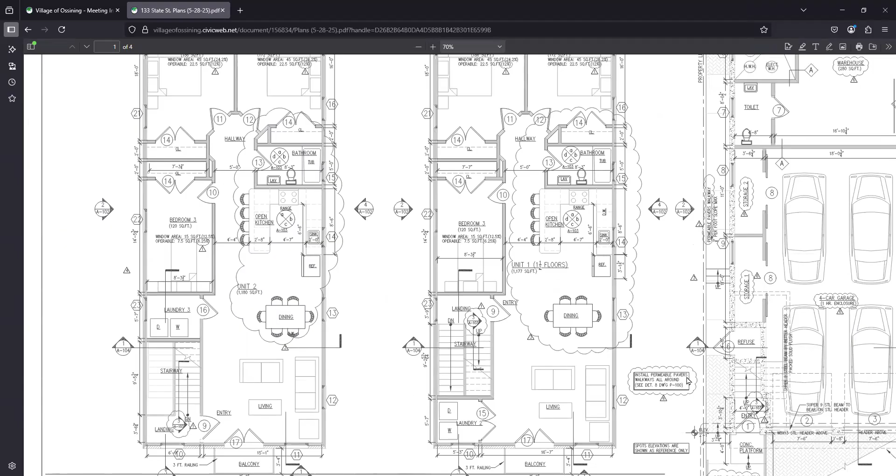On the second and third floor are two units with 3 bedrooms each, an open kitchen and a living room in the front. They're both basically the same layout, with a balcony in each one. Maybe we can move to the elevations.

That's the section, that's a long section, that's basically what it is. We have elevations on this set, there's a couple different sets in there. That's the last page. There's two drawings I know that have... it's probably best to start with that, the rendering. Yeah, that's the rendering, right?

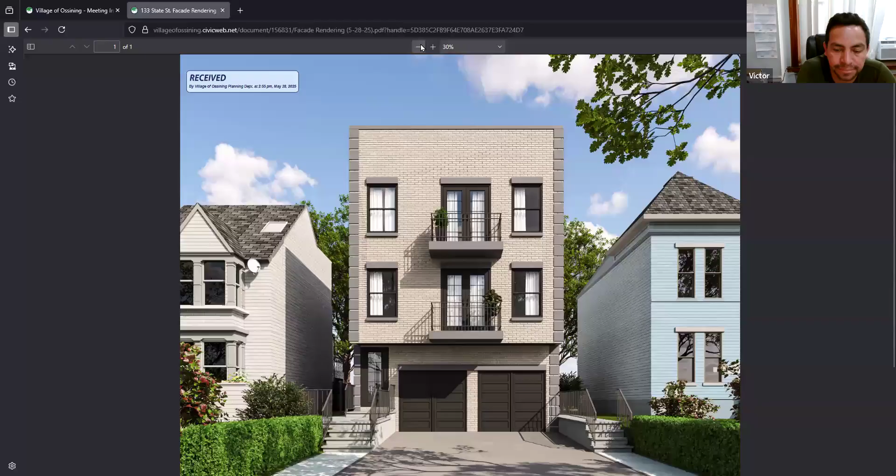Can you kind of go through materially what you're proposing here? Yes, the idea is to have this entry with two garages, two doors. We're doing this dark material for the doors with brick front, with an accent on the corners. And then the front is going to be all pavers.

Only the landings are going to be concrete and stone. All the walkways are going to be pavers. The color of the brick, as you can see, is very light beige. And the siding on the sides, just the front is brick, the rear and the sides are a light beige, tan color.

Okay, we'll pull those drawings up in a second, but let's stick with this drawing here. Can you just describe the material, the brick, the quoining on the sides, on the corners of the building? Is that material stucco? It looks like stucco, but it's actually a brick accent. Yes.

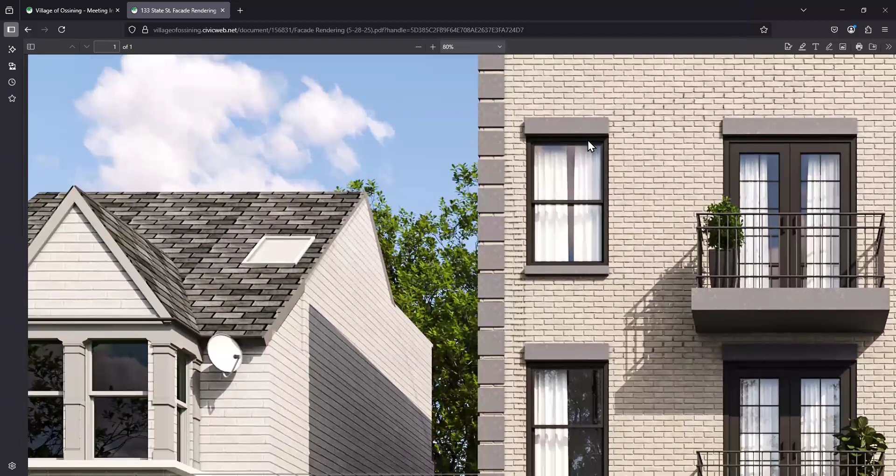Oh, so those are actually... if you zoom in on those, maybe I'm seeing that more here. Yeah, those are, this is probably the rendering effect, but in the drawings it's more clear. They're all brick. Okay, and how about the lintels? The lintels are all brick as well, the same color as the accent on the corners. It should be, they're not expressed like that.

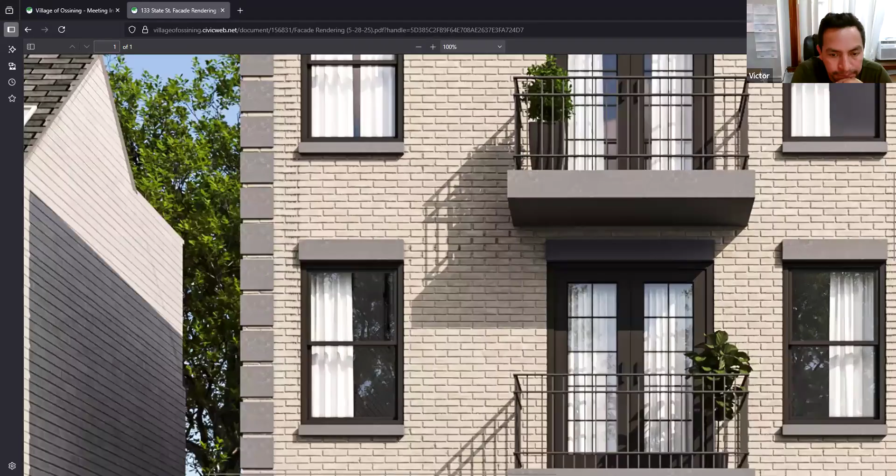And what about the balconies, the fascia around the balcony? They're not concrete, but they're a wood material, hung from the structure, with the railings that are shown up there. What kind of rail, is that a metal railing? It's metal railings, unless the owner wants to change it, because that's what I thought. Yeah, no, the metal is going to be metal. It looks like aluminum or something.

Can you just describe what the material is? Is that rendering accurate in terms of what you're proposing, in terms of the design? Yeah, that render is very much close to what we wanted.

You said the balconies are wood, but is that fascia also wood, or are you proposing something else? It's got to be a cover material. It's going to look very solid on that side. I think we're going to do it so it looks like concrete, but it's going to be done with the EIFS system.

Right, so it's a stucco. Yeah, stucco. And is there no drip edge or anything on the top or from the roof, or will the stucco be straight through the way you're showing it? Well, I think probably he wants to stick with stucco. I think I agree, because it would blend the whole thing.

But on the plans, that would be the owner's decision. That's fine, but keep in mind we're asking these questions because our board is evaluating the facade and the design of the exterior of the building. To the degree there are decisions that need to be made, we need you to make them before we can approve the project.

Okay, so Victor, do you think it's going to be stucco on those things, even in the cap above? Well, I don't... that on top, that's going to be... Excuse me, I don't want to have a design conversation in here. I think one of the things we're doing is starting a conversation and putting some questions out there. To the degree these are not items you guys as a team have decided on yet, I think it's fair for you to come back.

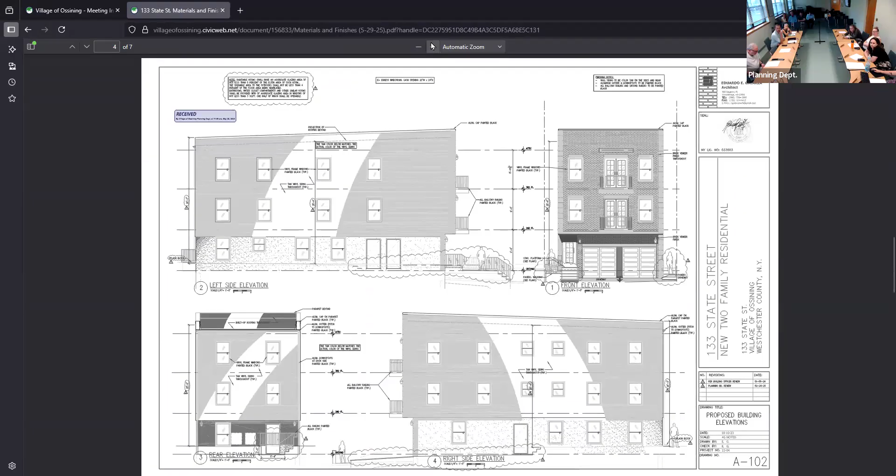Let's look at these secondary facades, because I think you started, Eduardo, talking about the sides. Yeah, as you can see, the sides are plank. So, the sides on the back.

The sides are on the back, just the front is gonna be brick. So is it a Hardie plank linear siding? Is it aluminum or vinyl? As the architect, I decided there's gonna be a Hardie plank, tan color, that's the basic idea. I think it says tan vinyl on the elevation, right? Yes, vinyl siding.

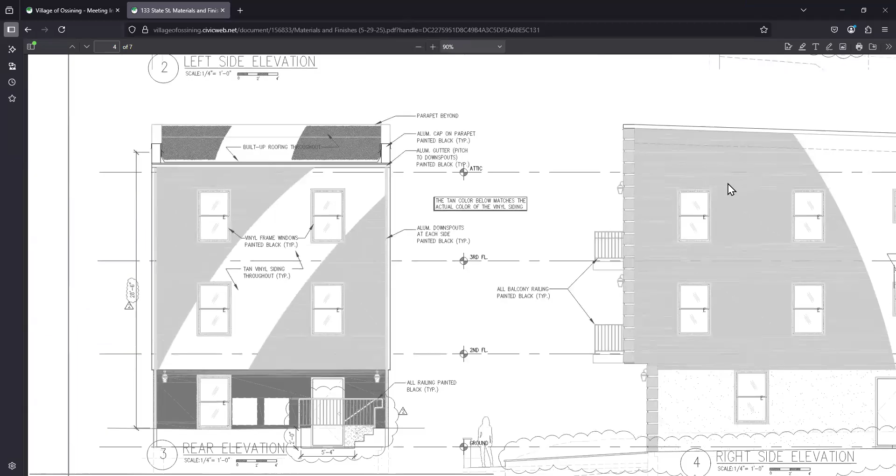One more question - I do want to open this up to the board, but underneath the siding there's a concrete hatch on what I'm assuming is the exposed foundation wall. How is that being rendered? What's that material? That's stucco, right?

I would like to open this up to the board just to start walking through and asking questions here.

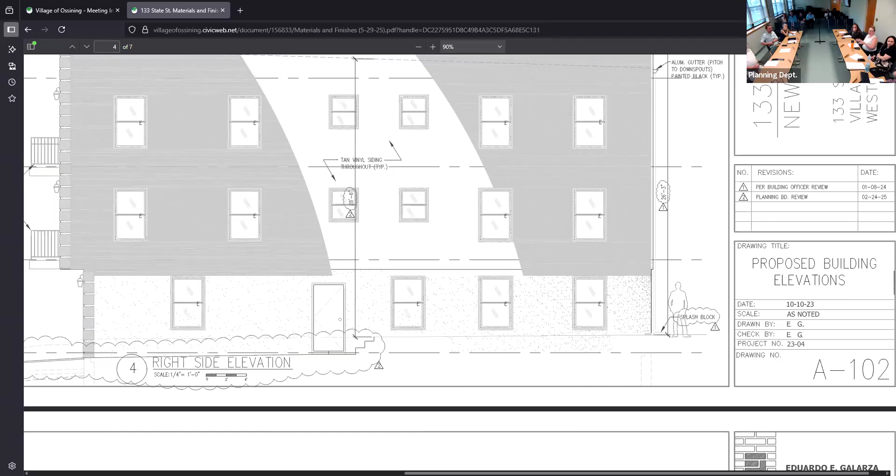I have a question regarding parking - just to confirm, is the intention for the left garage to be for one apartment and the right garage for another? It seems like the cars would block each other when entering. On the ground level with 2 spaces on each side garage, is the intention that 2 spaces to the left would be for one apartment and 2 spaces to the right for the other, so they can coordinate themselves?

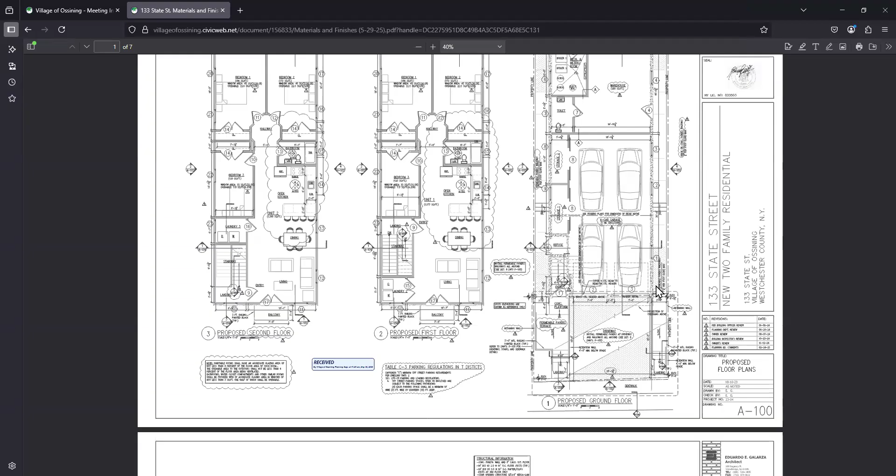There's no entry from the garage, you gotta come out from the driveway. Also for clarity, we are only doing BAR on this one, so there's no site plan review on it. They're fair questions to bring up, but I want to make sure we're staying focused on what we're able to opine on.

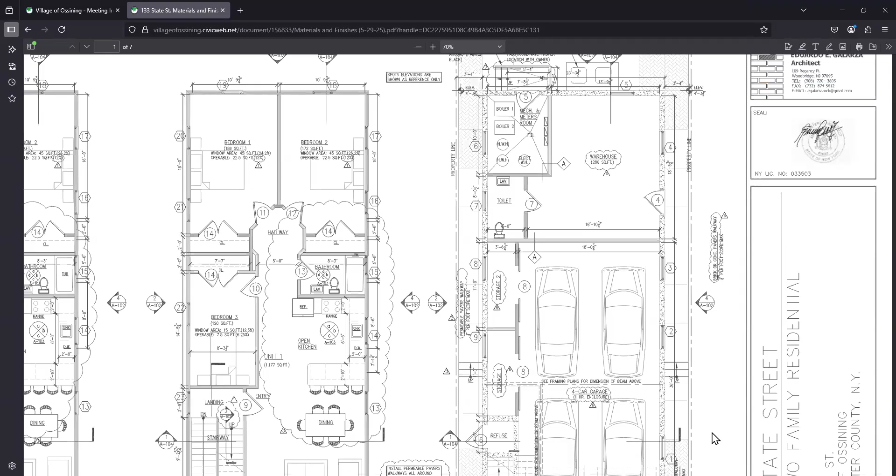I couldn't understand the question. I didn't ask it yet. So I'd like to go back to the rendering and look at the facade.

I have a question about the cornice, it seems a little flat. I don't know what minor architectural detail can be added to make it a bit more interesting, provide a little more depth or context to how the facade reads. The rest of it looks good. It's just that blank space - is there a really high ceiling or an attic up there? No, there's no attic, it's just the pitch of the roof because it's a long building.

Is that a parapet? In the section, you're showing a parapet facing the street, right? Yeah, there's some parapet, about a foot of parapet around it.

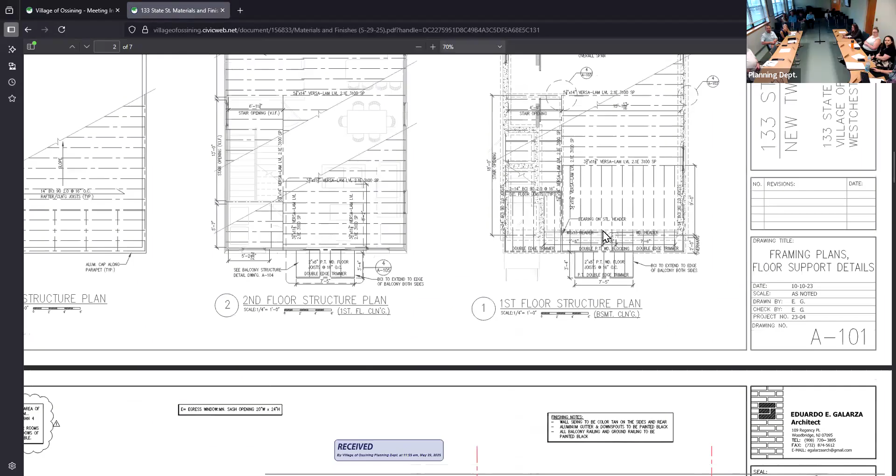And it's a flat roof, I'm assuming? Yeah, it's the back - can we show the section? That would be helpful. You can see it there, I guess - that was the first rendering, the color rendering, as was asked.

It's not showing on this one, but you can see there's a little bit of a pitch on the roof. There's side parapets as well, correct? You have parapets on the side walls and on the front wall, and then there's a gutter on the back, is that correct?

Did you ask me a question again? Yeah - you have parapet on the front, and it looks like two sidewall parapets that are a little bit lower, then a gutter on the back side. So the entire roof drains to a gutter on the rear? The parapet is on three sides - front and sides - and the back has no parapet because the water runs straight to the gutter. Correct, but there are sidewall parapets with leaders on each side.

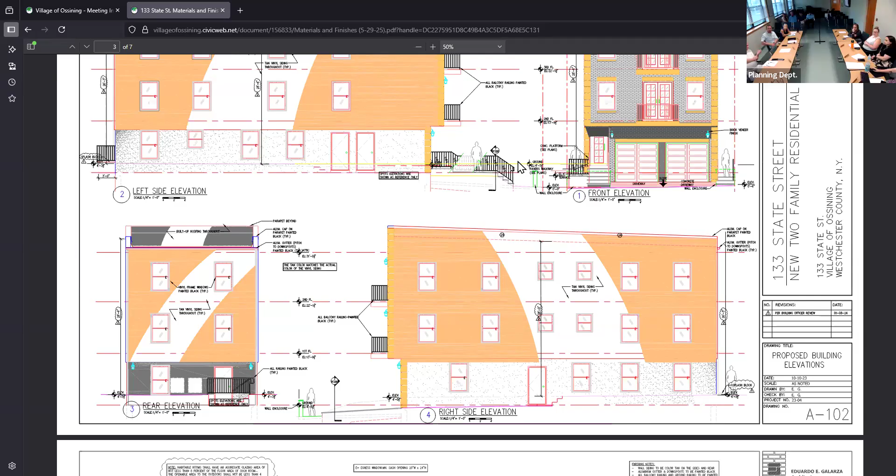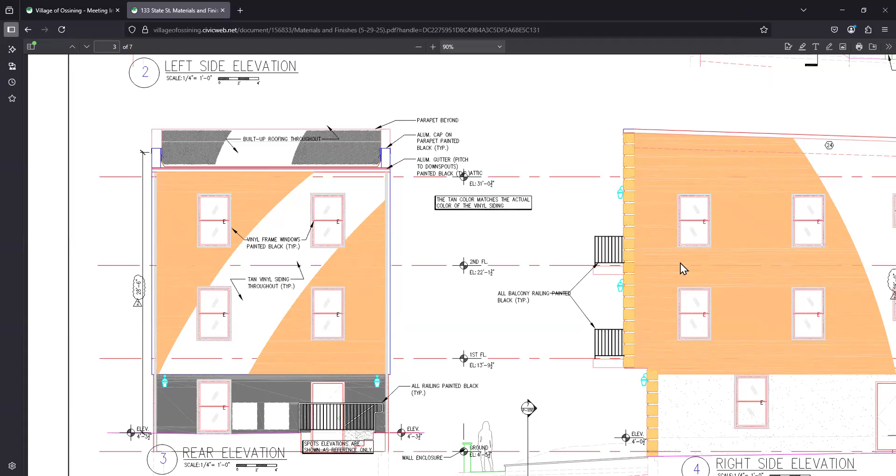Let's zoom in on that rear elevation to see those leaders - are they shown? Yeah, you can see the rear elevation, it's just the roof there, a pitch roof. Are those tied into the storm drain? The leaders tie into a storm drain in the back, yes, all the way down to the ground - a splash pad. So it's not doing what you said.

Your question, I think, was relevant. If we can go back to this, to the street facade, now that you have a better lay of the land, now that you've seen that parapet. Just that, how it's not, right?

Is that an aluminum coping that you're showing on the top of the parapet wall? I think that's what Michael's question was referring to, the cornice or lack of, how the building ends up at the top. Aluminum cornice, aluminum coping cap, is that what you're showing at the top? It's supposed to be aluminum at the top. Yes, aluminum cap.

I don't know if there's a way to, I mean, you've got this contrasting brick color, which you're using in the quoins and apparently on the lintels and sills, which I still have questions about. It should be very much, you know, matching the whole thing, as you can see on the rendering. Even in my own render, this was an artist rendering, but my rendering also shows that the accents are of the same color.

I think that's not the question. I think the question is just that this is very thin, very developed, and nice, but very thin. You may be right. I think it would be nice if you had probably a double line, so you might get an accent to the corner, to the top. Maybe that's what you wanted. Yeah, I agree that it looks a little thin there. Something there to give it a little bit more heft, a little wider. Yeah, we can say, but I agree, they should be a little wider.

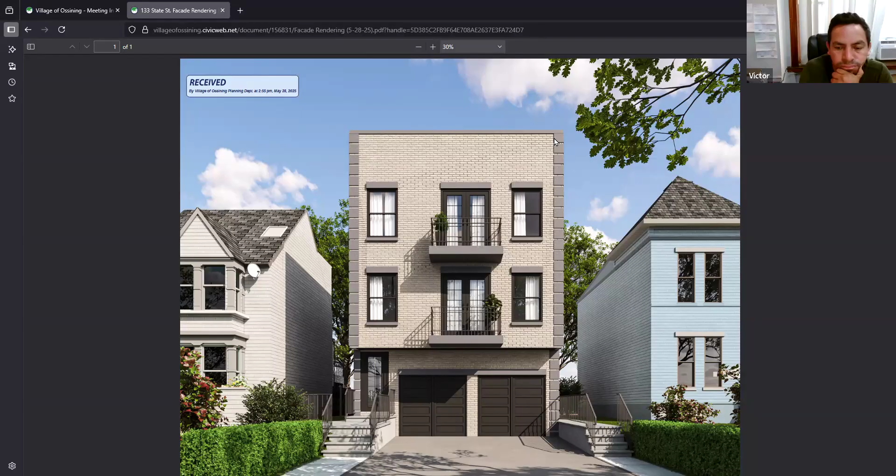Probably the same color as the lintels on the windows, probably. It should match, at least that. Yeah, I mean, probably like 8 inches, right? At least, that's about 8 inches, yes.

I mean, right now it looks like you're cutting one of those corners, like you've got these points, very hefty, and then on top, one of them is something slimmer, so that might be also just a portion that you can borrow from, but I'll let you figure that out, whatever you think makes sense.

I also would like to understand a little bit better the materiality of those lintels, because I think it looked nice. I thought it was like a cast stone or something, and it's also with the windowsills. If you guys want, and it's something you guys will vote for, I can put a stone on the corners and also on the top of the windows if that's needed. We want to start with this project and we don't want to keep delaying, so if that's what you need, I can do that. It looks like a stone on the corners and also a stone on top of the windows, so if that's the case and that's how you guys want it, I don't mind, I can do that.

I don't know that we're telling you what material we want you to use. We're just trying to understand what it is that you're proposing, what that would look like. I think the design may be totally appropriate in that regard, I just don't see that represented in what you've given us.

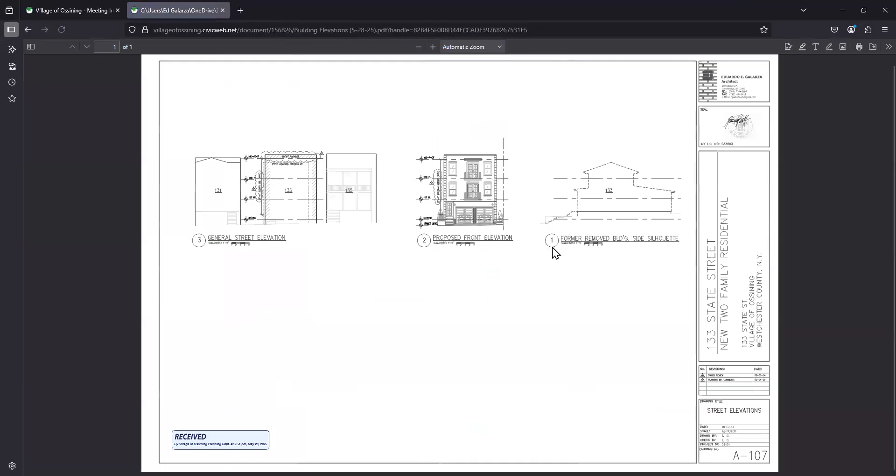Yeah, the rendering is a little bit difficult because that's a renderer's version. We go back to the building elevations. I understand, but the purpose of this is different. I think the other sheet, the one that says materials and finishes, that was in the more developed drawing. So the front, the way up, yeah, it's right there, right. That's right.

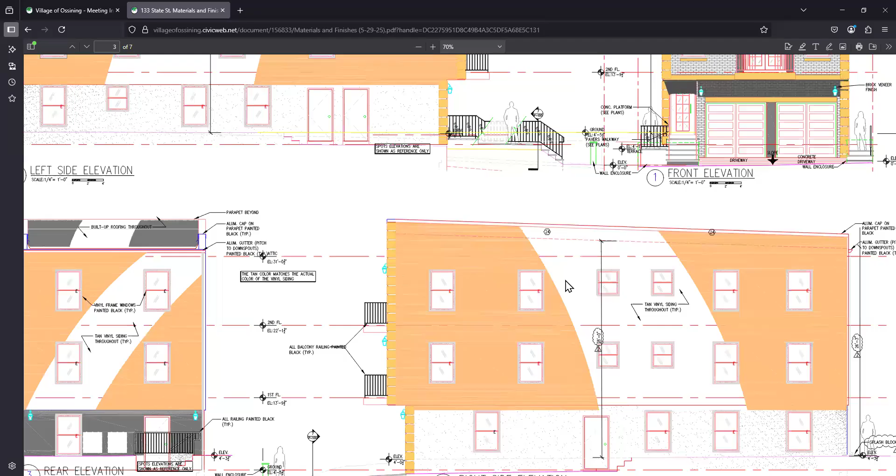They said that's going to be painted black, that cap. Right, yeah.

What is that above the second floor balcony? There was an additional cover, that was supposed to be like a canopy, but we took it out. It's not actually in the rendering, right?

So I think the renderings and the plan should match. Agreed. And I'm not suggesting, I know the comment, Victor, regarding, we'll just do whatever material you see here. I think you have some degree of material on this drawing, and if you're showing soldier course brick above the windows and kind of like a row lock sill, I think that may be appropriate.

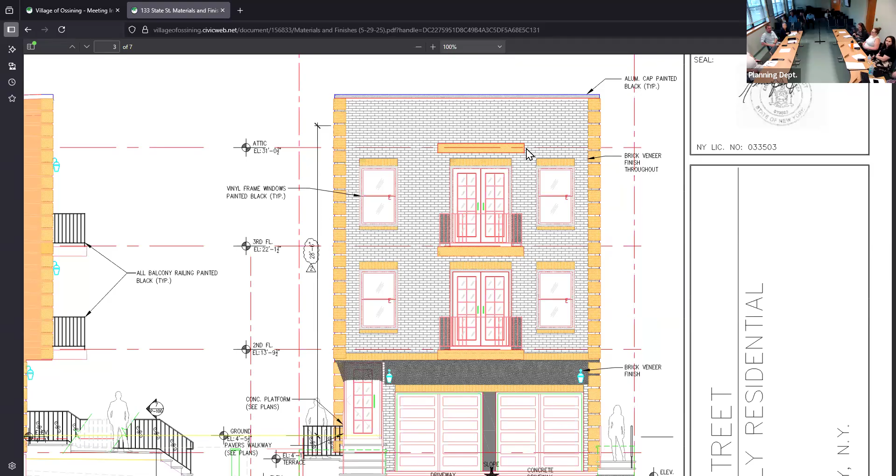I think that the question that Michael had regarding the top of the building is just as evident on this drawing as it was in the rendering. The ring, right? I think that you need to have some resolution to that.

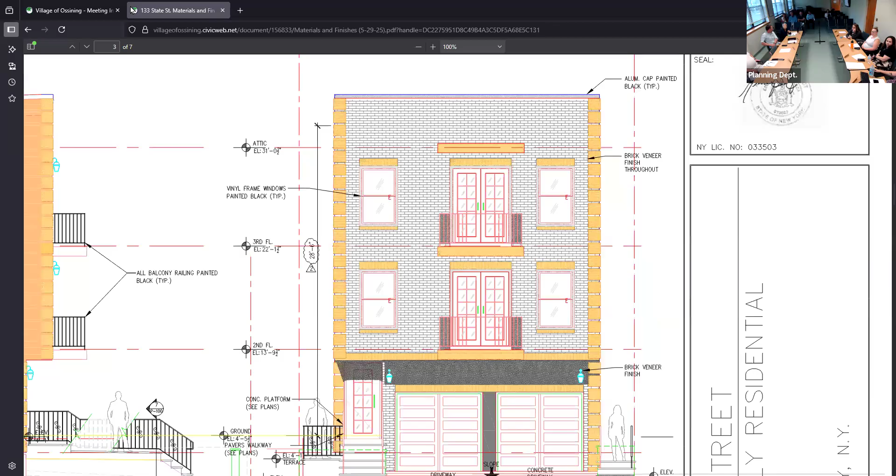I don't know if I have any real comments on the sides or the back. Visibility, who can see the sides, the back, we kind of get a sense just context wise, maybe Google Earth. Well, there's a site photo that shows the adjacent properties. Color photos of site right there. So it's pretty locked in with those three properties.

And I think it would be good to clarify whether it's HardiePlank or vinyl that is going to go on the sides of the property. There seem to be some.

Once this building, like this photo is probably a good one, if you're walking down the sidewalk, how far away are you from the sides of the other two houses? And the reason I'm asking the question is to get a sense of how much of that you'll see and how much of that siding you'll read as you're walking down the street.

Basically, I think the minimum distance between buildings is about 6 feet on the side. But we have 3 feet off from each side on our building. 3 feet on your side and then 3 feet on the other side of the lot line. Yes, that's correct. All right, that's what I assume, yes.

Other board questions on this?

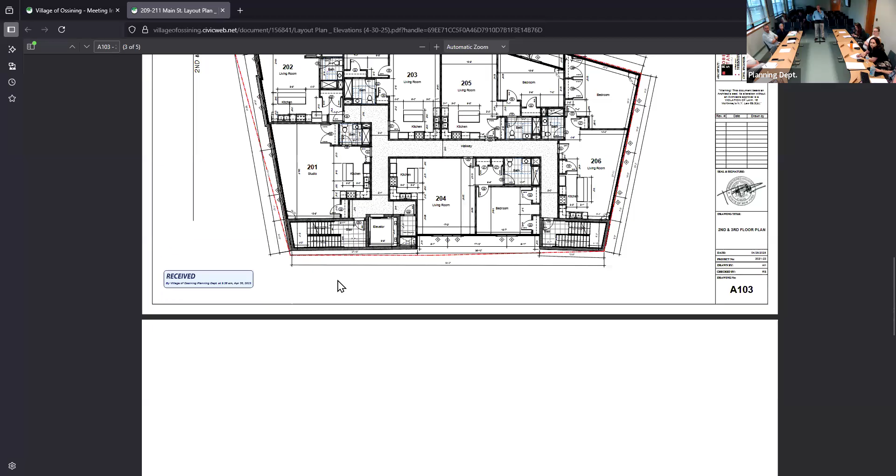The building on the ground floor will be commercial. There'll be 4 apartments behind that, and on the upper levels there'll be an additional mix of studio, 1-bedroom, and 2-bedroom apartments, for a total of 16 apartments in the building.

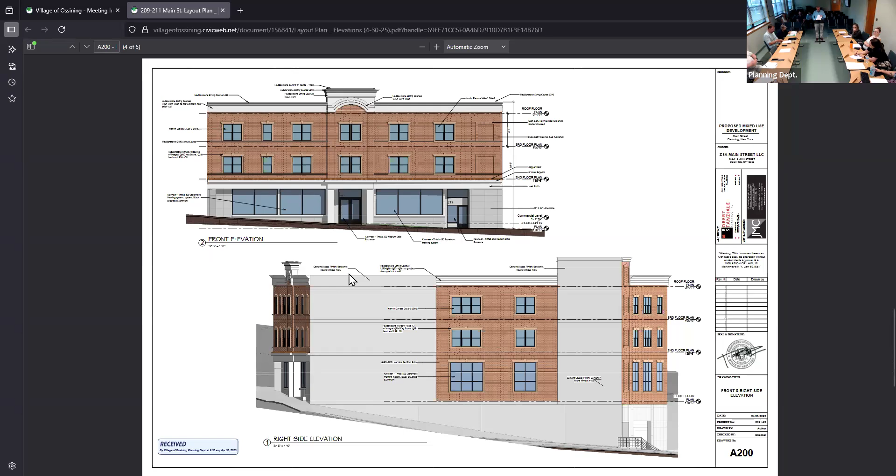The parking areas I mentioned will be in the lower level, accessible from the municipal lot in the rear. We are shy 1 parking space, but we also propose to utilize stacking units to achieve 28 spaces. We need to have 29 spaces.

That's not an ideal situation. Originally, we had this building designed with 2-bedroom units, but when the zoning regulation changed and increased the amount of habitable space required for apartments, we redesigned and lost a bunch of 2-bedroom apartments, so it didn't quite work out as nicely as it did before.

So we're here, as I mentioned, to continue the conversation as well. If we need to purchase more spaces from the village, staff spaces to use, if that makes the situation better, that's a discussion for sometime in the future.

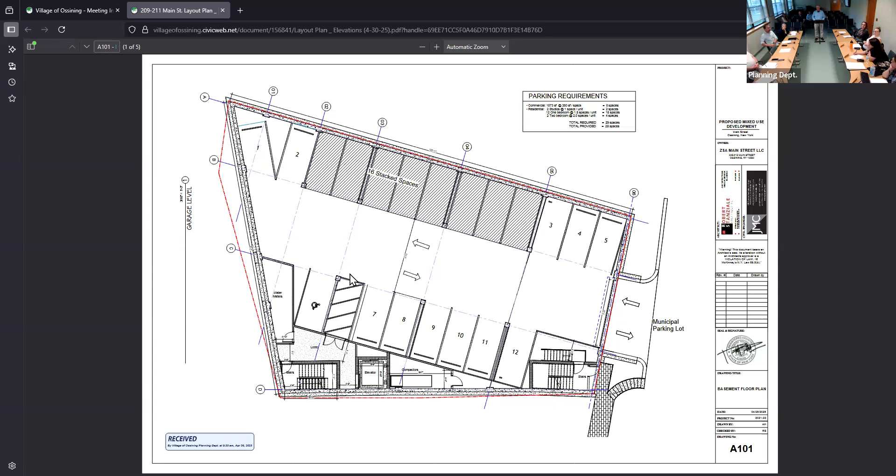The building's lower level will also be a sanitation area. There'll be refuse chutes in the building going to a compactor in the basement, so there'll be private carting that'll pick up the compacted refuse out of the rear of the building, coming from the municipal lot as well.

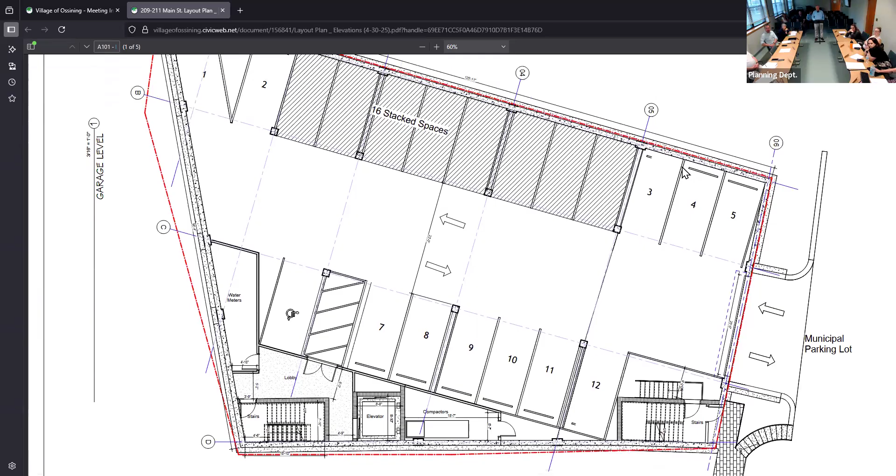Floor plans, as I mentioned, Maddie can show those. You can see here at Main Street the commercial space runs covering almost the entire side. It's a little over 1,500 square feet.

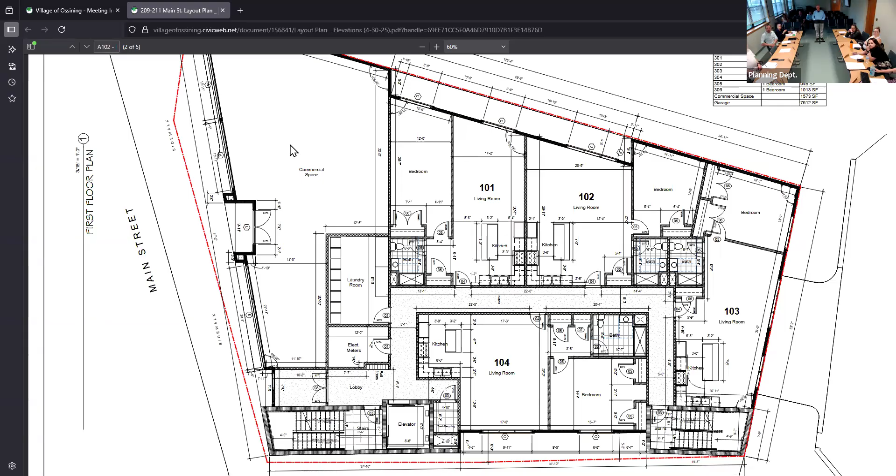On the right-hand side of the building, in the lower left of the screen, would be the entrance to the residential apartments, with apartments behind as mentioned. The entrance is from Main Street, yes, correct, that gives access.

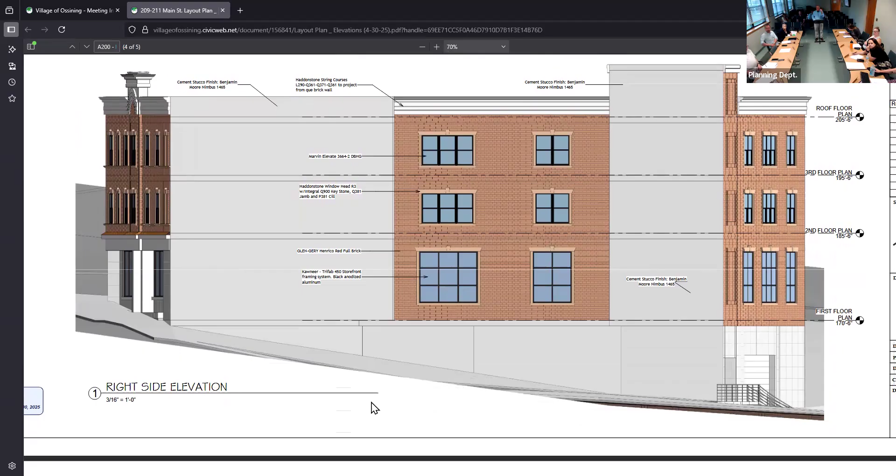As you can see if you scroll down a bit on the map, on the side of the building and in the rear also, since we have a 15-foot first floor to second floor ceiling height, floor to floor difference, we're hoping to incorporate some large, very tall windows so the apartment feels loft-like to make it more attractive, since a couple are undersized and have a great view between some of the windows.

Is that a light well next to the sill? It's another building next to it.

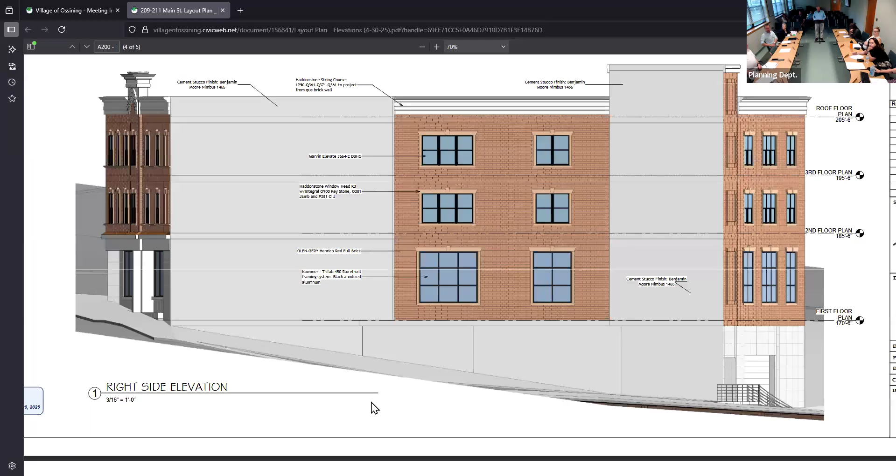We started, just briefly, that's our building. John Meyer Consulting, Rich Gordon will speak a little bit to that, but we've started working on some of the engineering with the village engineer. We're looking to utilize and take some of the utilities for the building from Main Street, and do our sanitary sewer to go out towards the back of the building, to the parking lot where there's a connection back there.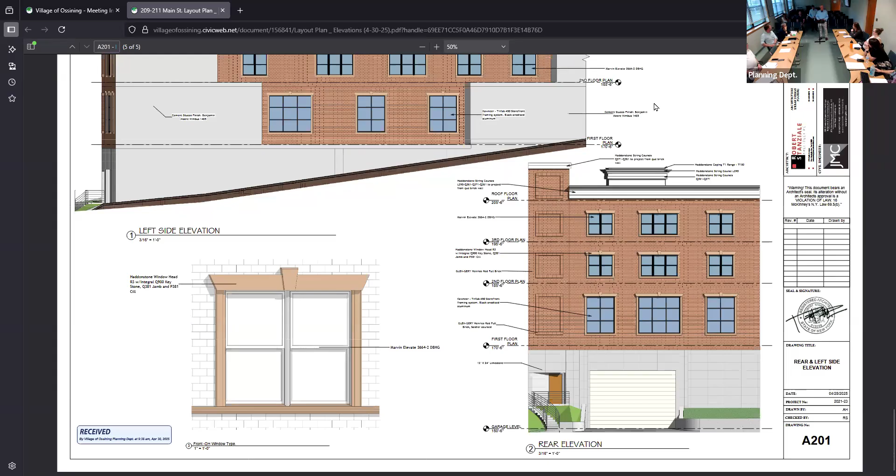You want Rich to speak about that, this would be just... Yeah, I mean, I guess you have someone here, it'd be helpful just to get a lay of what you're planning right now. Yes, right. Rich, yeah, they have that plan. Which one am I looking for? James has the plans.

So, I guess the best drawing to speak to. I'm so sorry, would you mind if you repeat?

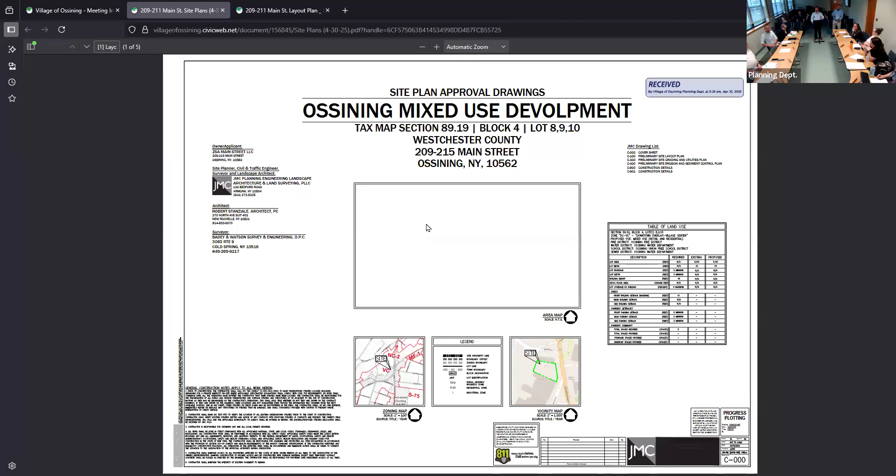Village of Ossining. So right now, this is our site layout plan. As you can see, it's basically a property line to property line development. We are proposing to redo the sidewalks in the existing right of way. The New York State right of way could use some attention. We're spending all this time making this next to the building, so we're going to relay the existing pavers and clean everything up there.

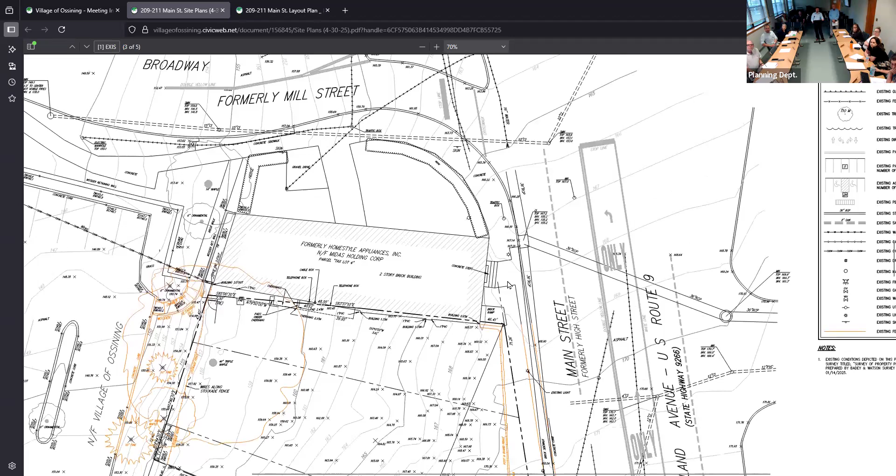We're proposing to, if you want to go to the next sheet, shows our utility connections. Okay, so we are proposing to go across Main Street, which is a State DOT US Route 9. We are proposing a water service connection there as well as a gas service connection. This does require a New York State DOT permit, which is something to process.

As you can see, we have our sanitary sewer connection as well as our storm connection at the back of the building, going through the municipal lot. We are proposing a green roof on the roof of the building, which will help us handle some of our stormwater mitigation there, and get us some attention and project value.

So then what we'll do is drop it down into the ground floor here and run everything out. As I said, this is pretty much a property line to property line development, so we have a limited toolbox that we can pick from to take some measures. That was the easement that you saw on the prior drawings.

The utilities there, this parking lot? Yeah, this is a proposed easement that we're looking at with the town.

Storm and sewer work best under gravity. It's going to be very, very difficult for us to tie this out to the streets. That's one of the biggest things that we are going to do with the town, make sure that... acceptance, right?

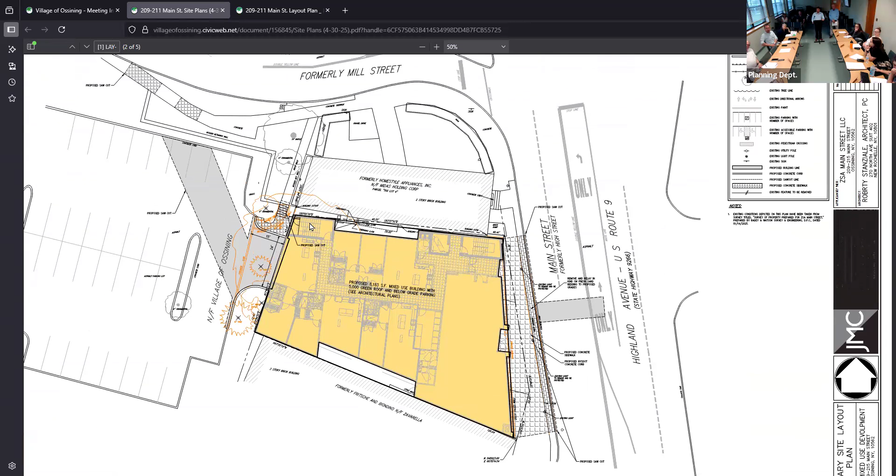So we will be preparing the stormwater management plan in accordance with the 2024 New York State stormwater design management guidelines. So we do have a roadmap ahead of us that we will pursue to satisfy the conditions.

Yeah, no, I think this is super helpful. It's a super challenging site, right? It is challenging, like I said, property line to property line. It looks like, oh great, you threw this box under, now you just draw the lines, but there's a lot of pieces that go into that we have to shake out. Sure, the architects do that, us engineers just take it.

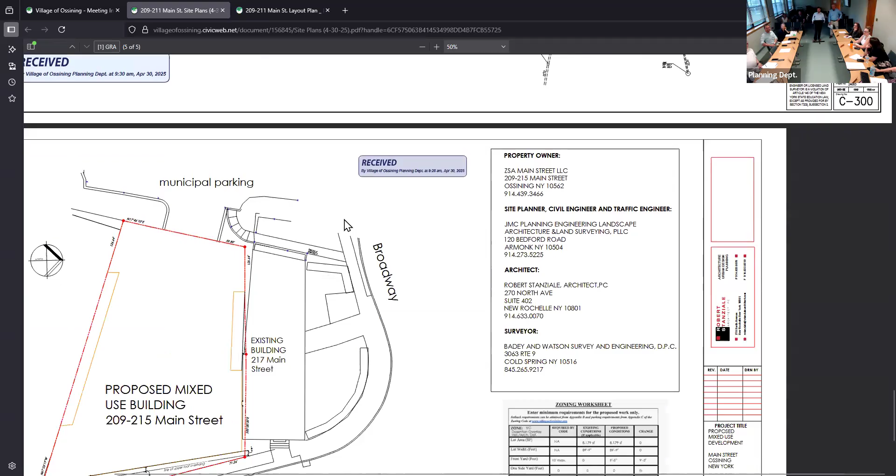I just want to mention something—when you look at those utilities in the back, and I know you're eventually going to have to set some easements and stuff, just be aware of that wall that's there too. Yeah, there is an existing wood retaining wall that we did note there. We anticipated having to redo that, but if you look at where it crosses that wall, it's only about 1.5 feet high.

Okay, yeah, I was trying to line it up when I was looking at the street view, I couldn't really tell where you were at. I was trying to get it, counting down the 4 parking spaces, so it's only about 1.5, 2 feet high. So to be honest with you, we may be able to just tunnel under it, but we'll take a look at it. If it has to be reconstructed, it's something that we're planning for.

Where is that retaining wall? It's running left to right, north. You'll see there's that dog leg up there, right. Let's go up a little bit. Yeah, there's the wall right up over there. It's like a railroad style wall that steps down as the street comes down.

That's actually connecting to the utilities on Broadway there, like across from the rec center. Yes, that's correct. There's an existing drain inlet there, and then there's an existing sanitary sewer there. So we will be connecting to both of those, and that whole area would be...

You would have to do some excavation. Fortunately, the excavation's not very deep right there. I'm running my pipes at about 4 feet deep, which is kind of minimum, so they'll be able to plate at the end of the day and work just like any contractor would be working in the street, make it safe for the public and everything else.

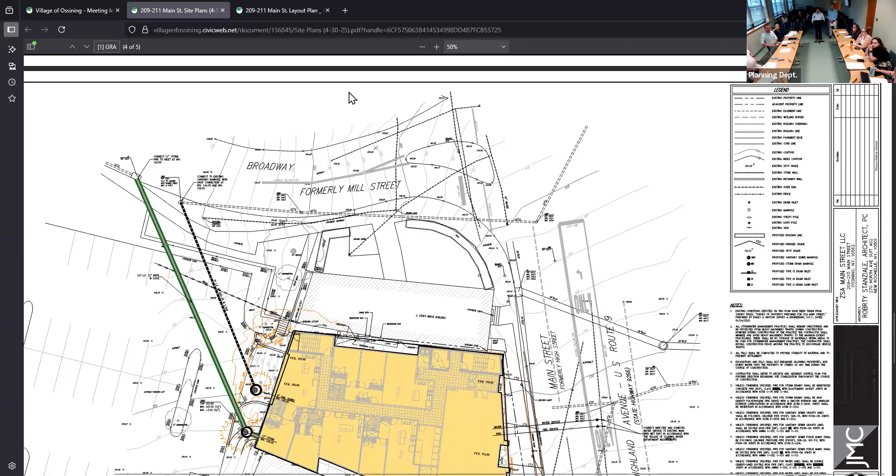Have you guys, this is maybe more of an architectural question, looked at the buildings that used to be there and some of the historic photos of how the site was occupied? I saw one photograph, I hadn't seen much more than that, Mr. Chairman.

I think the Ossining Historical Society has more. Yes, correct. The building inspector showed me a photograph. So I can take it. Yeah, that's just the side.

Yeah, we have plenty of challenges on this site. We're concerned about the buildings and the chases and things like that. So, yeah.

How much site work has been done in terms of site investigation, any soil samples, or any preliminary engineering work? Yeah, we're about to engage in some test work now.

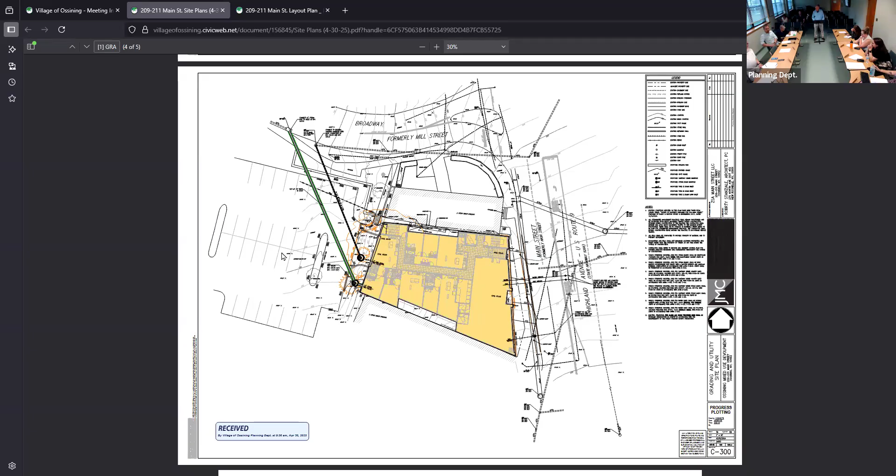I guess, Tony, you started some of your comments, are there any other major concerns the applicant is going to have to focus on that we should be looking at as we start this? They mentioned a lot of it — the DOT, they're going to have to go through that. We have to go to the health department given the flows, which are gonna be close to that 2,500 gallons. Working with the fire department too, since it's a building that's only got two sides, as we mentioned.

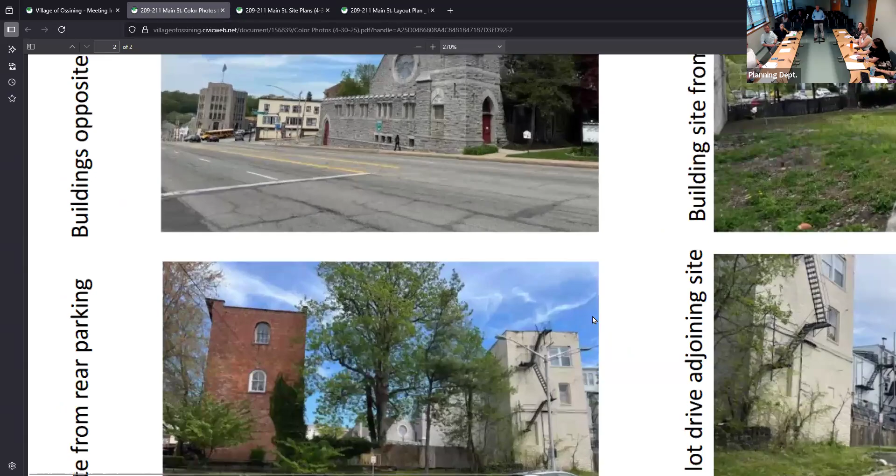Okay, yeah, I didn't know. I was thinking about how the parking lot works, like the ground level residential that's behind this, over the parking lot. Yeah, that's probably the second floor, I think. Yeah, okay, that's just something I had a question on.

But all the engineering stuff, like you said, I understand it's the variance and you haven't gotten into that yet, so a lot of the comments are on stormwater, and that design will progress as that stuff goes to the city. I would start with the health department. Yeah, as quick as you can.

There was some other zoning issues, a concern that came up in the memo about backup space. You can show us on the height of the building. I've done an analysis, we're okay.

I submitted it to the building department previously because it was asked first — we're okay, we're actually at 45 feet as our average height. In that analysis we're having to do some... yeah, looking at the guidance, I didn't see that somewhere.

Right, I think it'll be good, I can provide some. Right, so while the building department probably did look at it, we need it as part of the document.

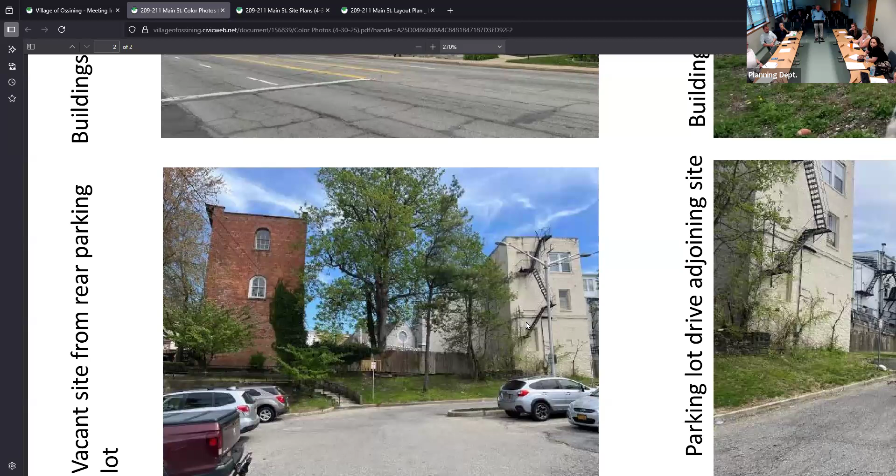Absolutely. I think a couple other things with the zoning — let me just talk about what you're gonna need approvals for, because you're gonna have to coordinate a lot of this. Right, so we are gonna need the board to do SEQR review, and this is an unlisted action.

I would recommend considering doing a coordinated review. Since Westchester County has a number of permits, it might be easier to do a coordinated review with them — they prefer that if possible.

And then also in terms of finalizing your zoning, we still have to figure out if you need any zoning variances. If that is the case, it would be easier to do a coordinated review.

You also need historic preservation approval — so again, another reason. And then village board approval will need to be granted for both the easement as well as the access for the parking lot. And then you also need a referral from the EAC for the local waterfront revitalization consistency.

So we can coordinate when the best time to go to these different boards is, but at this point I think we need another round of submissions in a little more detail before you're ready to start with that.

The other thing too is on your plan — you mentioned both the VC and the downtown overlay, but it's not both, it's either or. And I think you probably would fit under the VC as opposed to the downtown overlay in terms of what you're proposing. Yeah, that's what we're planning on. Right, so I would remove anything that refers to the downtown overlay and just keep the VC.

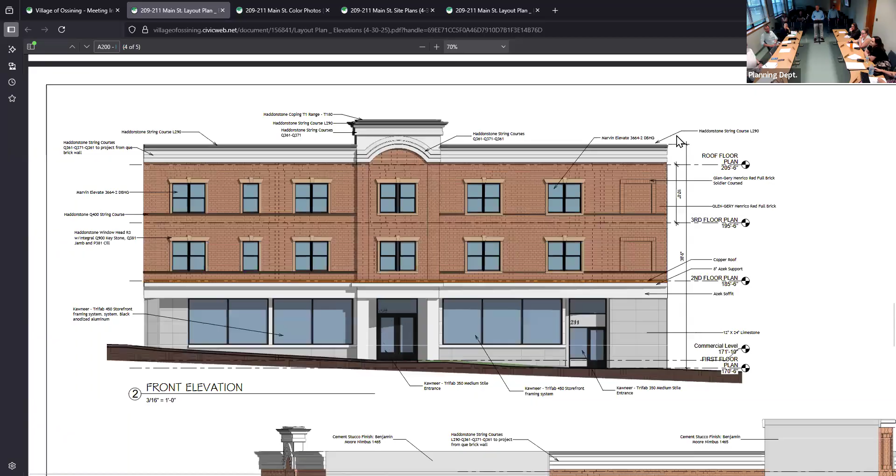I think that's the other thing - you did mention in your application that you might want to ask for more payment in lieu of parking, so figuring that out is important, because that ultimately goes to the village board.

I do have a question if I can. Part of the review - this building is proposed to take up about 100% of the entire lot, correct? Pretty much, yes. So on the buildings to the right and left, I noticed the exterior wall will be right up against theirs, and some of those buildings have windows on their side which will now be blocked. I'd have consideration for what this building obstructs on neighboring properties, because those windows could be bedrooms needing to meet requirements for light, ventilation, and egress. We'll do a full review at the building stage, but I believe at the planning stage it has to be considered what effects this building has on neighboring buildings.